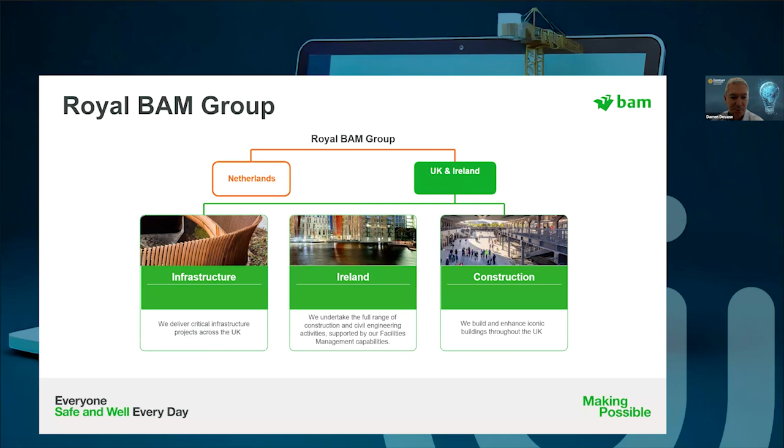So what do we do? In terms of infrastructure, we cover the entire range of infrastructure sectors in Ireland, with transportation, including light and heavy rail and roads, bridge construction, renewable energy infrastructure, and marine works. On the construction side, we work in the education, healthcare, commercial, high-tech and residential markets. And you probably see there in the middle, we're even delivering the new children's hospital that you might have heard about, as you'll see from the photo in the middle of the slide.

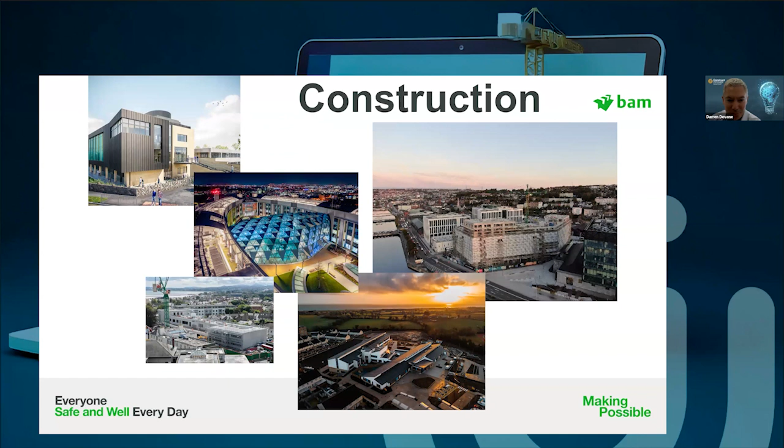We also have a property division, which delivers student accommodation, amenity centres, and both high-rise and housing developments across Ireland. Finally, we have a facilities management business, which maintains schools, court buildings, universities, shopping centres, and government agency buildings. So that gives us, I suppose, an edge from running through the entire life cycle of a building or a piece of infrastructure, from design right through to the end of life of an asset.

So what I'm going to talk to you about today is to give you my perspective about what's really the honest conversation around MMC. And I think it's important, first of all, to acknowledge the really successful implementation of modern methods of construction across all aspects of the construction industry in Ireland. In the last 20 years, we have shifted massively from an industry that, I suppose, stick-built every element on construction sites to one where off-site solutions are now the preferred solution for us.

The use of timber frame structures is well established in Ireland, and I'd estimate at this stage that approximately 70% of our housing delivery now uses timber frame solutions. When we get into the larger scale and more commercial buildings, precast concrete options are now our preferred solution, and they're used extensively in education, healthcare, industrial and residential apartment developments. And I have to say the precast companies really have adopted new technologies to push the boundaries of what is feasible to manufacture off-site.

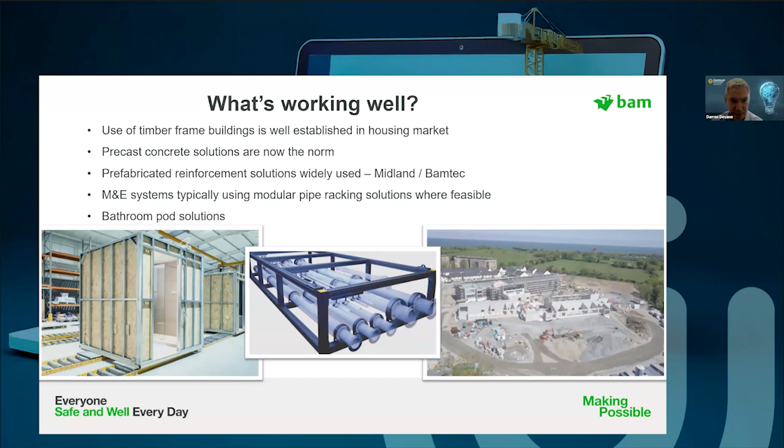You see there a clip of just some bathroom pods as well, which are a great example of modern methods of construction and offsite manufacturing done really well, done to a high quality and at scale and pace. So I think it was just important to point out it's not to throw the baby out with the bathwater, because there is an awful lot of really good work going on in the modern method of construction space. But that's not what we're here to talk about today. I suppose we're here to look at what's gone wrong.

We'll all have seen the headlines, particularly in the UK, around companies leaving the market, particularly the 3D volumetric market. In the UK, it even prompted the government to instigate an inquiry in the House of Lords, effectively asking this very question: what has gone wrong? And you can add us to the conversation as well in BAM, because while we are a main contractor, we also invested in a modular building company in 2019. We delivered approximately 1,000 homes, 1,500 bathroom pods, and a lot of construction site accommodation for our projects. But unfortunately, we took the difficult decision in late 2025 to cease operations at our factory in Cavan. So I think we have a close enough insight into what goes well and what doesn't go so well on the modular side.

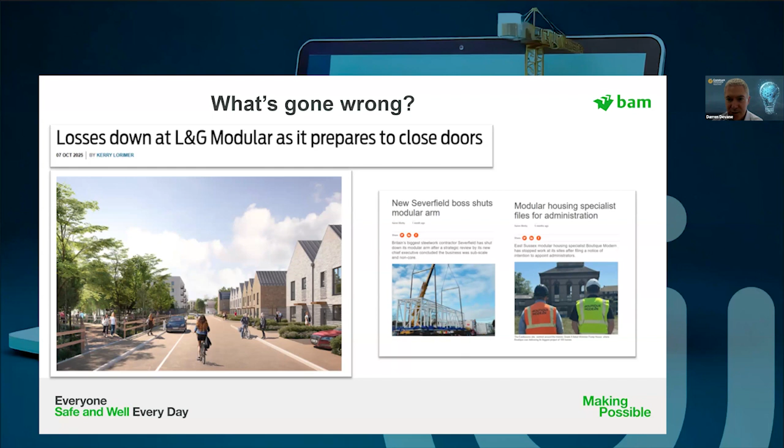So what led us to take that decision, and what are some of the challenges facing the sector from my perspective? A lot of what I will go through on this slide really relates to our experience of the 3D volumetric market. Really high upfront investment costs are certainly a significant factor. While BAM might be a large organization and able to finance that, for smaller organizations, trying to make that investment upfront is a significant outlay, when you don't tend to get your money back until the product is installed and certified on site, albeit there are vesting options that do come into play in certain instances.

The lack of standardisation is certainly a challenge facing the sector. The certification process, once you have it, is great, but securing the NSAI Agrément certification is an onerous task, certainly when compared to the 2D solution. But I would say the major challenge facing the sector is the inconsistent pipeline visibility, which is a challenge across all areas of the construction industry in Ireland, not just the modular space. I think we spend a lot more time than we would like crystal ball gazing when trying to plan our business growth. We've had the National Development Plan announcement in July of 2025 with significant commitments to infrastructure delivery for Ireland, but with little granularity to allow us to plan for that investment.

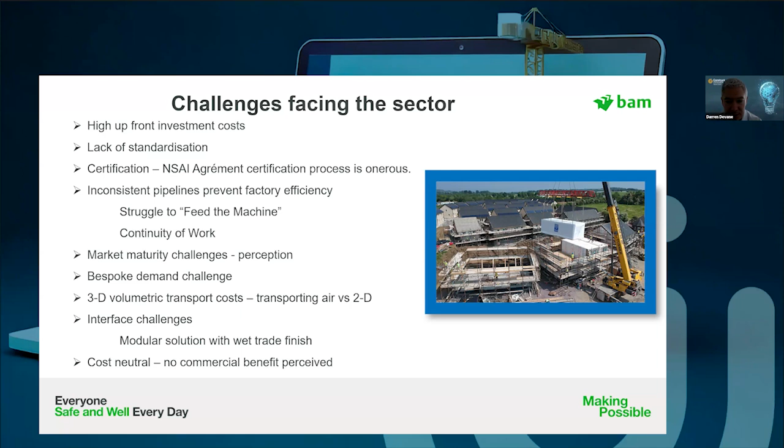Transport costs are certainly an issue when we look back and we count the numbers, particularly for 3D volumetric, where a lot of what we are transporting is air compared to our timber frame solutions. And then the framing around cost is, to my mind, somewhat narrow-minded. When we compare the direct cost of a modular solution versus an in-situ solution, it may be slightly more expensive. However, we really have neglected to take into account the savings in preliminaries, the savings in defect rectification from site-installed processes, and the superior quality of a product manufactured in a controlled environment.

So again, some of the key challenges that we have found: it does require early design freeze. When you're setting up a factory and you're setting up your equipment, this needs to be done at the early stages of the project. It does force the design teams to freeze the design early, and sometimes that can be a challenge because, I suppose, we're not making Swiss watches here. It's construction and things do change as projects evolve.

No question about it. The continuous pipeline I've spoken about is, to my mind, the single most important factor in trying to promote the use of modular solutions. Design restrictions certainly play into this. Precise planning is another issue we've found, where the integration between the elements that are constructed in situ versus the precise product that comes from a factory environment sometimes can pose a problem. The financial model I spoke about earlier, companies trying to secure funding and the upfront costs involved in providing a modular solution can be a strain for a lot of organizations.

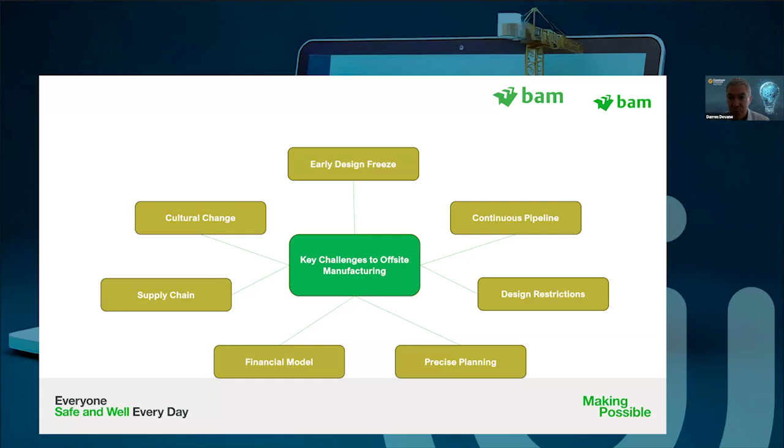Supply chain challenges are, I guess, no different to the rest of the construction industry. There is a demand now for construction and skilled operatives in our industry, and that is only going to become more significant as the National Development Plan starts to come to fruition with major infrastructural projects really starting to come to sight. And then the cultural change, which again is the perception in the market around what modular construction is, what are the perceived benefits and what are the perceived weaknesses of a modular solution.

So in terms of some potential solutions, government supports are certainly required to incentivize the 3D volumetric market. There are major opportunities in healthcare, education and housing, and the government needs to provide visibility of a pipeline to encourage investment. The obsession with steel and concrete, as I said, needs to be challenged. The requirement for embodied carbon assessments in public tendering will certainly focus the market to look at alternatives, and that can only be a good thing.

Procurement strategies for public tendering. I spoke about the Department of Education and Youth, and they have an impressive framework of modular school building solutions in the market at the moment, and that is really positive to see. They may need to look at their award criteria for other public tenders to reward the use of modular solutions in the bid process. How we market modular solutions: as an industry, we need to dispel the myths surrounding it. We need to extol the positives and work to address the challenges that prevent it from being a successful solution for a sustainable industry.

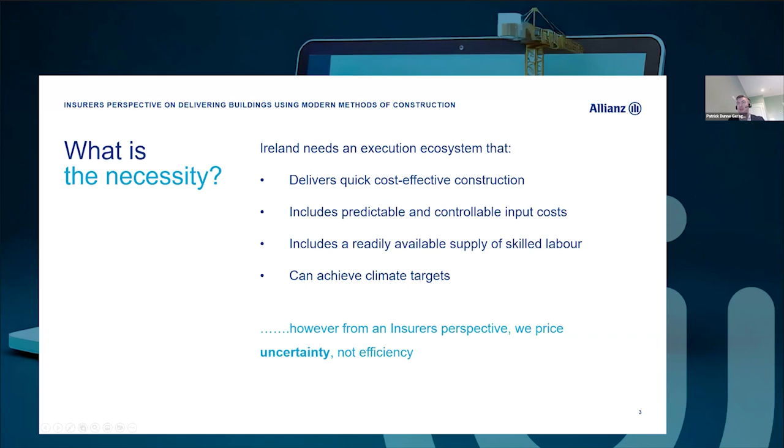So what's the result? So when you've got uncertainty in risk, it leads to higher premiums. It leads to capacity hesitation or appetite restriction from insurers. It can lead to exclusions and limitations. So what we mean by exclusions or limitations is if there's uncertainty around a particular type of construction or a methodology or a contractor's experience in delivering that construction, it might push it outside of appetite.

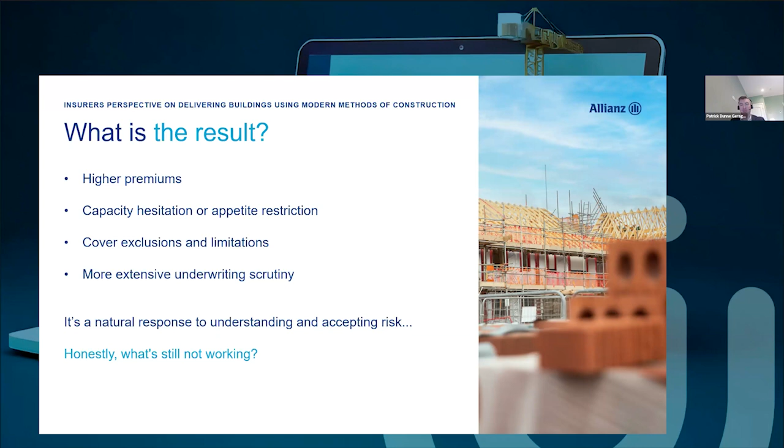We might restrict what we do, or it might be a case that we need to understand it a bit better. So what we might do in that instance is we might do pre-quote surveys to try and understand it a bit better. We might have a look at specifications, and we look at where we have interacted with that contractor, not necessarily just in Ireland, but perhaps in the UK or further afield as well. It also leads to more extensive underwriting scrutiny as well. So it's a natural response to understanding and accepting risk. But what we'd like to discuss then is honestly what's still not working.

So what do insurers want to see? So we as insurers, when we're looking at a risk, irrespective of what it is, we're looking for predictability. We're looking for repeatability, traceability, and accountability. So traditional construction gives us decades of claims data, and modern methods of construction don't necessarily do that. Now, that's not necessarily a negative thing as such. Just because we don't have the data today doesn't mean that we can't understand it and can't form a view on a particular type of construction.

One thing that Darren mentioned in his presentation was in relation to the modular housing. So we would insure a significant amount of modular housing. Initially, there would have been a bit of hesitation around that, not only Allianz in Ireland, but other insurers in the local market too. That hesitation comes from years of being used to insuring brick and block, stone and concrete properties. That move into timber frame took us a while to get used to as well, in terms of understanding what the potential was for loss. And then further, the likes of MHI, which was the company owned by BAM, which was an absolutely fantastic modular steel frame construction company.

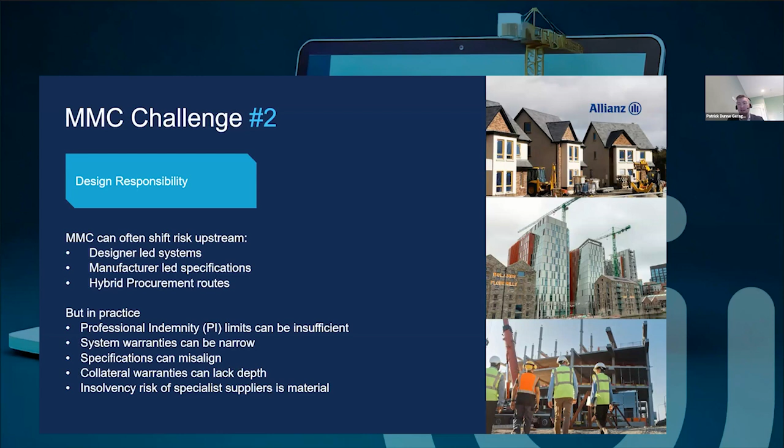The second challenge in relation to modern methods of construction is design responsibility. So MMC can often shift risk upstream for designer-led systems, manufacturer-led specifications, and hybrid procurement routes. But in practice, PI limits can be insufficient, system warranties can be quite narrow, specifications can misalign, as I mentioned earlier, one proclamation of a material being non-combustible, and then a certification stating that it's highly combustible. Things like collateral warranties can lack depth, and insolvency risk of specialist suppliers is a material risk as well.

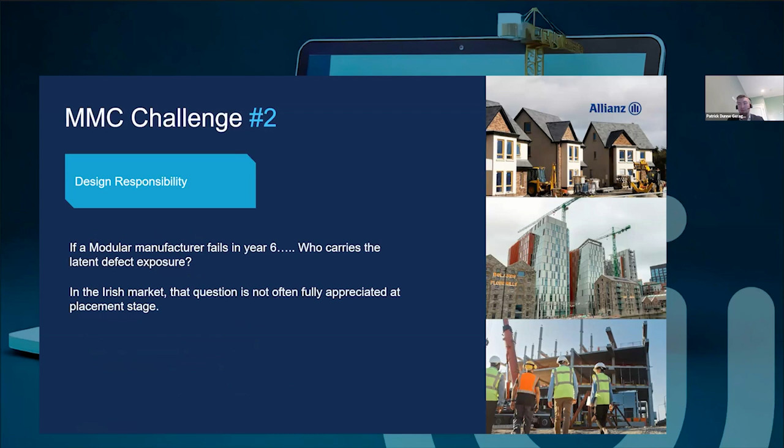Additionally, if a modular manufacturer fails in year 6, one of the questions that we ask is who carries the latent defect exposure? In the Irish market, that question isn't always fully appreciated at the placement stage.

The third challenge we have is reactivity to fire and water. Two of the most dominant claims types in modern methods of construction are fire and water ingress. From a fire perspective, we see cavity barrier variability, on-site modifications, and inconsistent supervision at junctions. From a water perspective, off-site precision doesn't always eliminate the likes of transportation damage, sequencing issues, interface failures, and weatherproofing issues. So MMC has not yet demonstrated a reduction in this loss class, and that's where insurers are quite hesitant in accepting modern methods.

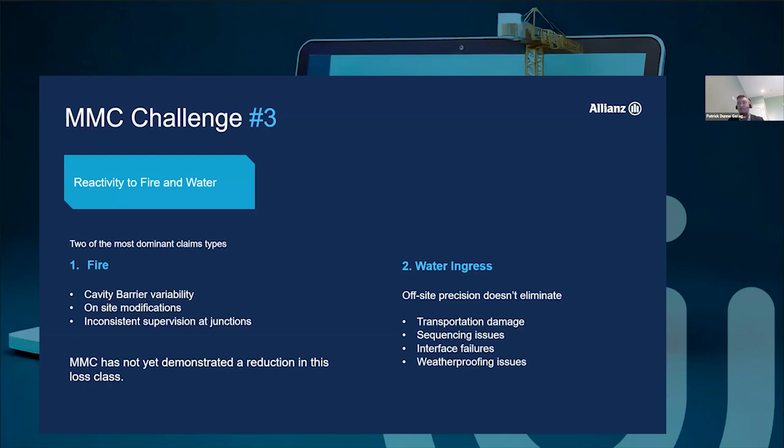Challenge number 4 is underestimation of factory risk. Modern methods of construction can centralize risk. When we're looking at a traditional construction site, you might have 100 contractors across 100 different sites. That risk is very, very well spread. Whereas if there's a failure in one factory supplying 1,000 modules, that failure is very centralized. So it's a single point of failure. There's business interruption exposure and accumulation risk across multiple developments.

If there's an error with one subcontractor, the issue is likely localized. If there's one supplier that has an issue, the issue is likely systemic. So traditional construction spreads the risk while modern methods of construction can concentrate it.

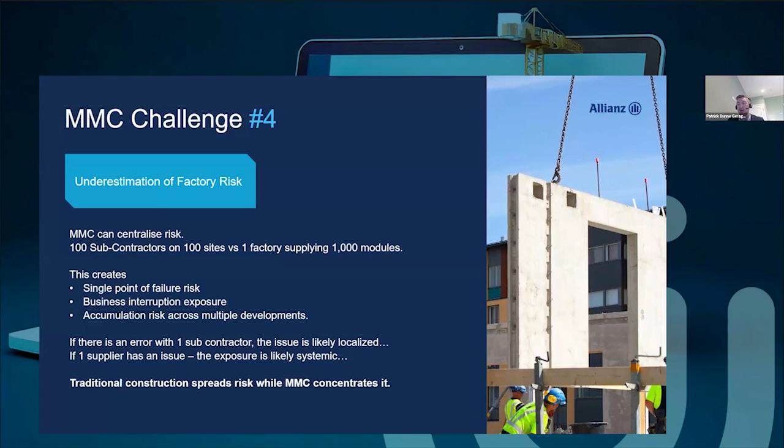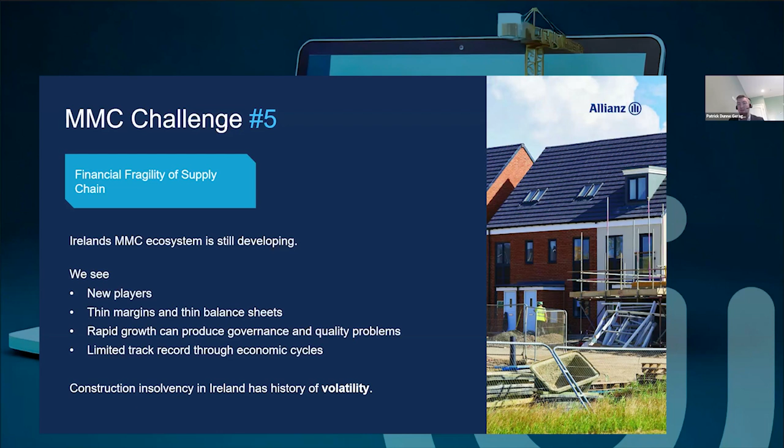Another thing that Darren touched on in his presentation previously was financial fragility of supply chains. Ireland's modern method of construction ecosystem is still developing. We see new players, thin margins and thin balance sheets, rapid growth, which can produce governance and quality problems, limited track record through economic cycles, and construction insolvency in Ireland has a history of volatility.

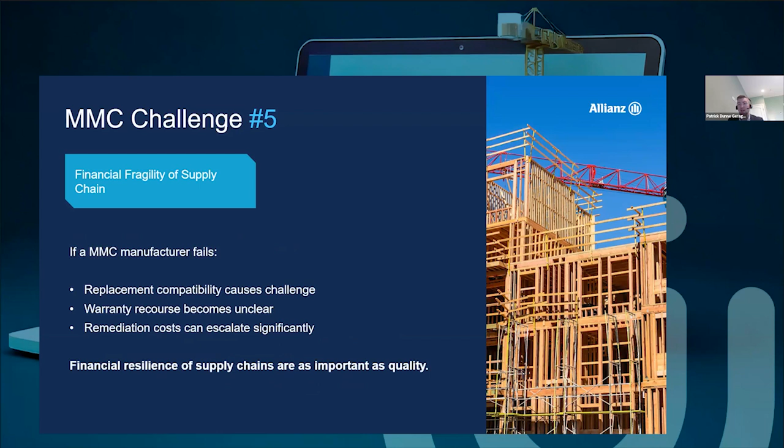If a modern method of construction manufacturer fails, replacement compatibility causes a challenge, warranty recourse becomes unclear, remediation costs can escalate quite significantly, and financial resilience of supply chains is as important as the quality.

Challenge number 6 is overstated standardisation. So modern methods of construction are sold as straightforward and repeatable, whereas in reality, sites vary, foundations and conditions vary. Same sounding methods can vary considerably. Reinstatement creates hybridization and oftentimes at a higher cost. We often see part traditional and part bespoke.

I just want to touch very quickly on the reinstatement creates hybridization and oftentimes at a higher cost. So you might have a bathroom pod solution and there might be a leak in that bathroom pod. Oftentimes the trace and access is quite expensive to find where that leak is, and oftentimes the bathroom pod is taken apart and replaced with a traditional system, which leads to a higher cost than originally envisaged.

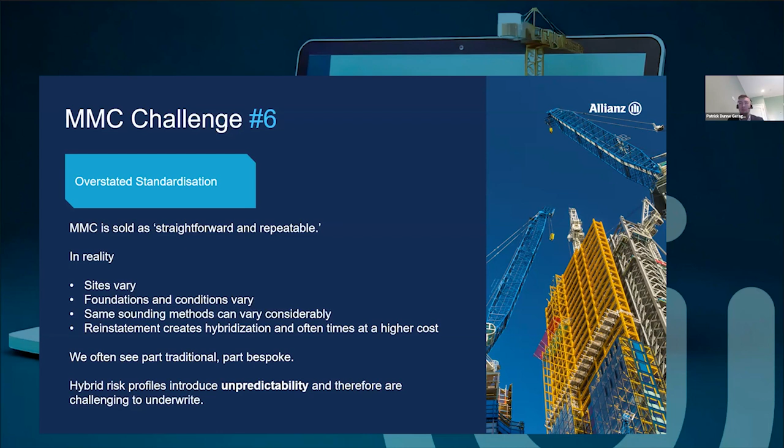Hybrid risk profiles introduce unpredictability and therefore are challenging to underwrite. When we say they're challenging to underwrite, it doesn't mean that we can't do it. It's just that we need to understand it a little bit better.

Challenge number 7 then is late insurance engagement. So insurers are most frequently consulted at inception or near practical completion. Often at both of those times, the decisions are locked in, which is a missed opportunity. So we as insurers are rarely involved in the original design phase. We're often brought into the fold very shortly before the project goes live.

And it's a missed opportunity for us to provide contractors and developers feedback in relation to what works in insurance and what doesn't. And keeping in mind, we have loss experience not only in Ireland, but across the globe that we can feed back into that process and help you. So if insurers are engaged at concept stage and during the system selection, many coverage issues can be avoided. When your insurer is a design stakeholder, it limits issues later on.

So we see the same challenges repeated over and over. And I suppose with being such a large construction insurer, we're able to share those challenges as they arise and allow you to make informed decisions. So what requires consideration? Industry-wide anonymized defect and performance data support certainty. Performance bonds aligned with latent risks. Financial stress testing of manufacturers. Robust insolvency contingency planning, and consistency of statements and certification.

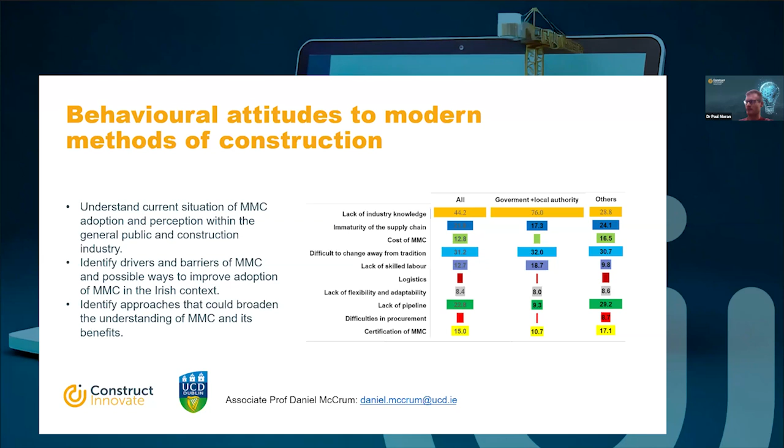So some of those issues are obviously still ongoing, but through the projects that have been funded by Construct Innovate and through all the various different working groups that have been set up across the different government initiatives, some of these challenges are trying to be addressed through various different projects. So one of the projects that we've funded here through Construct Innovate is a project involving the University of Galway and DRES, and the focus of that was the development and building of a community centre and a creche using mass timber and offsite design for manufacturing and assembly.

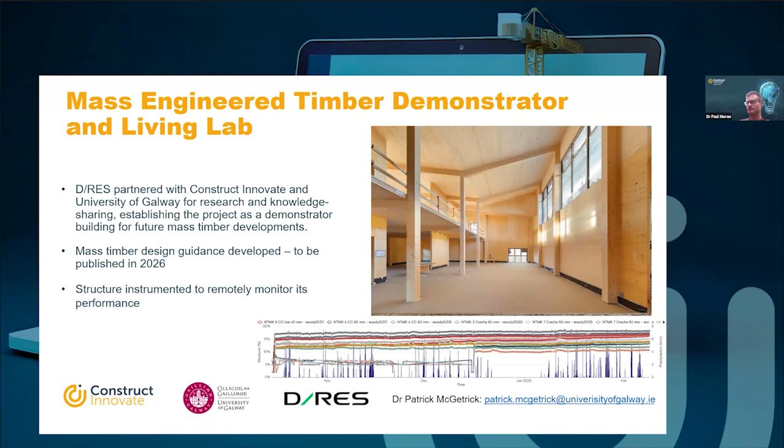So using these demonstrator buildings, the idea was to build up guidance that would help to inform the industry on how to deliver these projects, training the industry on how to deliver these projects, and then exemplar projects, demonstrating to the different stakeholders within the sector that these types of projects can be delivered successfully. So as part of that, there was ongoing monitoring to validate the performance of the buildings. And then on top of that, there was embodied carbon analysis carried out to show that this timber-based solution could be delivered in a sustainable manner and that it was meeting the Royal Institute of the Architects of Ireland embodied carbon targets.

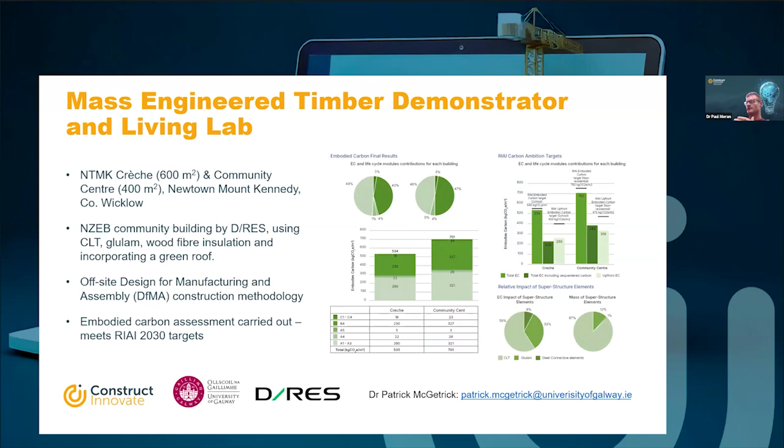So those projects are being built in Wicklow, and they're adopting the use of CLT, glulam, wood fibre insulation, and incorporation of green roof as part of their solution. And in the delivery of the project, I believe they're going to be delivered this year. All this design guidance has been developed and will be published by Construct Innovate, again, to help inform the industry on how these projects can be delivered in a successful manner.

Another project going on is focused on light gauge steel solutions. So one of the incoming building regulations for the industry is that we need to start assessing the embodied carbon of the projects that we are delivering in Ireland. And as part of this, University of Galway teamed up with Frame Space Solutions in County Longford to investigate what was the embodied carbon associated with their systems, and then identify potential solutions that they could incorporate to help decarbonize their current system offering to the marketplace.

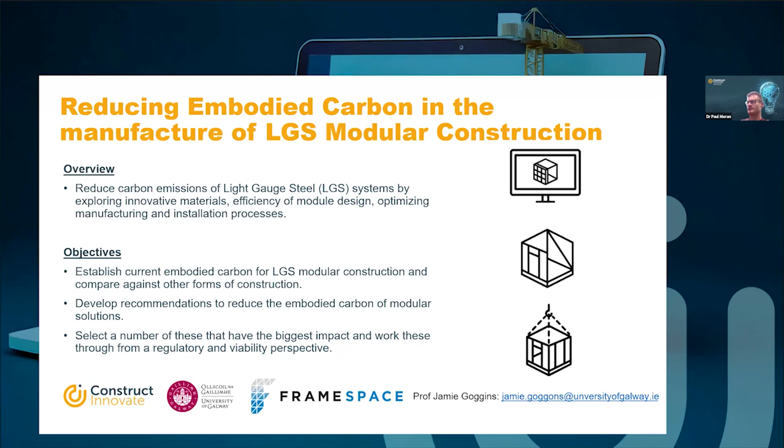Another project focuses on 3D concrete printing. So this project focused in on assessing whether recycled materials could be incorporated to help replace steel, all with the overarching aim to reduce the amount of steel in the way that we deliver projects, because steel is a high embodied carbon material. So all with the overall goal of reducing the embodied carbon and making the solutions for the marketplace more sustainable. So as part of that, the project, which involved Dr. Alireza Rahimi and Dr. Pouyan Ghabezi, I apologize if I mispronounced them, they identified different mixtures of polypropylene and high-density polyethylene, and how much of an impact it had on the properties of the system itself to improve the delivery of this 3D concrete printed solution.

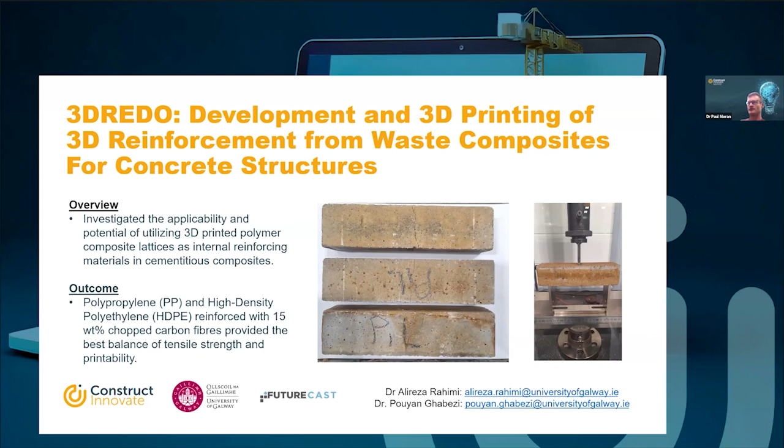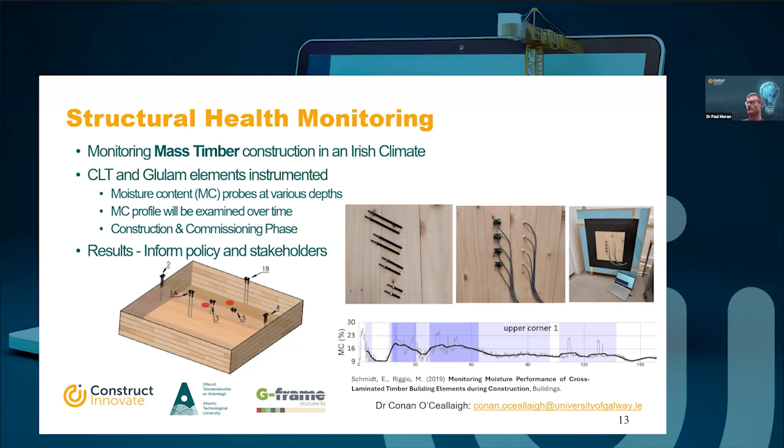One of the issues that was flagged on one of the previous calls was actually validating that these systems are going to produce long-term performance, and how do we go about de-risking that? So there's a project including Atlantic Technological University and G-Frame Structures. This involves actually monitoring the long-term performance of a CLT and glulam solution. So as part of that, they embed moisture content probes within the timber frame elements themselves and monitor the performance of the building over the long term to show how much the moisture travels throughout the building elements throughout the lifetime of the project. So Dr. Conan O'Ceallaigh is delivering that project, and if anybody has any further questions about that, they can get in contact with Conan.

Another project we have going on involves frame-space solutions in the University of Galway as well. As part of that, they are considering the way that they actually connect their MMC solution elements together. One of the issues with the delivery of MMC systems is actually connecting your modularized system together and the speed at which that happens.

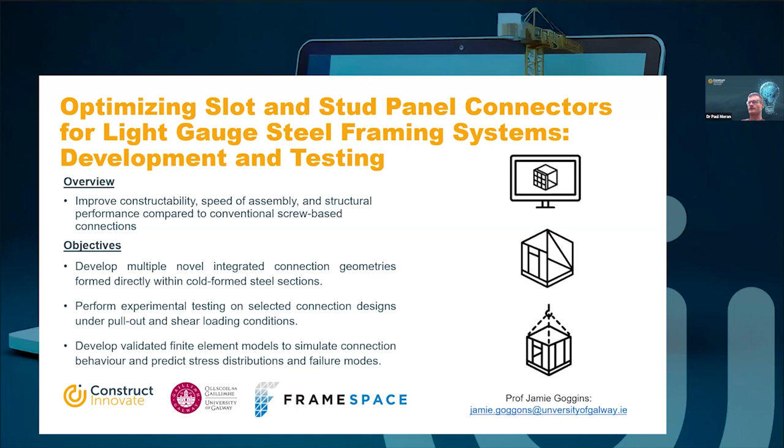Obviously, if you can improve the constructability and the speed of actually assembling your systems, that leads to a lot of benefits and helps to make the delivery of this solution more sustainable for the sector, reducing the cost of the overall system in terms of the time it takes to deliver the project. As part of this project, they are developing a series of different solutions, testing those solutions here in the University of Galway to validate performance, and then showcasing that this new type of connection system can be used for the delivery of the FrameSpace solution to the marketplace.

Then another ongoing project involving a series of different stakeholders, including University of Galway, Sisk, Coillte, Glenfort, with the main contact point from the University of Galway being Dr. Patrick McGetrick. This is focusing on manufacturing a project using cross-laminated timber, all sourced within Ireland. The focus of the project is showcasing that a project can be fully sourced, fully manufactured and fully delivered using resources obtained here in Ireland.

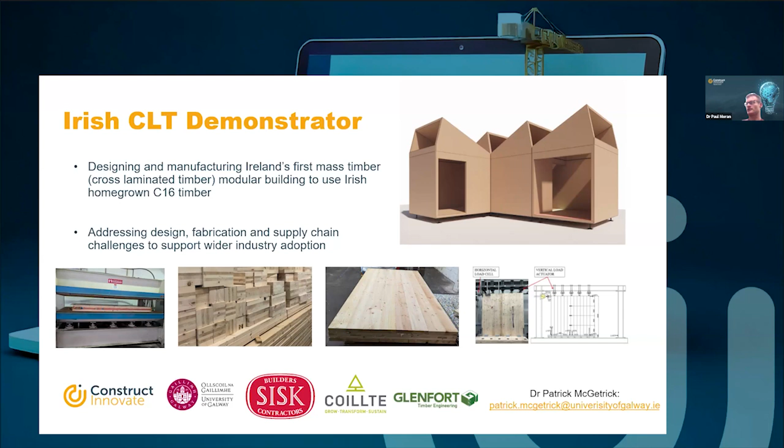That's using Irish grown C16 Sitka spruce. This is to showcase to the industry that this solution can actually be delivered, as well as tracking how efficiently it can be delivered to the marketplace on top of that.

Then this project called Standardize involves Dr. Daniel McCrum, Dr. Magdalena Hajdukiewicz, and Dr. Eoin King. It is a cross-collaboration between University College Dublin, University of Galway, and the departments of housing, of enterprise, trade and employment, and Enterprise Ireland. It focuses on developing standardized details for the way MMC systems are delivered to the marketplace, because there is such a high investment cost in getting Agrément certification for systems.

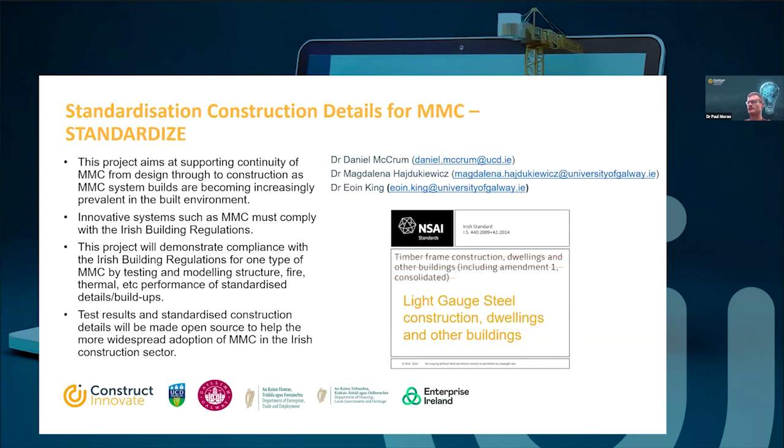If we can standardize these details, whereby Agrément certification would not be needed, that would make the delivery of MMC solutions to the marketplace a lot easier for suppliers and remove that initial burden of high investment cost in the certification process. So they're developing standard details, and then testing and modeling those details for structural performance, fire resistance, thermal performance, and moisture performance to validate that these standardized details can be delivered, and then creating these standards on top of that.

Then another project involving 3D concrete printing. In this project, HTL are working with UCD, with main contact points Professor Kieran McNally and Dr. Moran. Currently, when HTL deliver their 3D concrete printed solution to the market, they print the concrete layers at 50 millimeter thickness. The purpose of this project is to trial and assess whether that 50 millimeters can be increased to 75 millimeters, because the thicker the layer they can print on site, the less time is required to deliver these projects on site.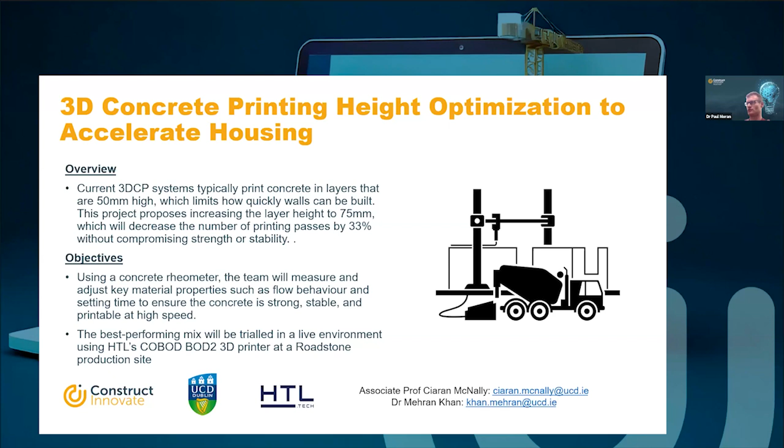And if they can reduce those times, that obviously leads to other benefits in terms of cost, etc. So again, it's companies coming with their challenges to academia, and academia investigating, improving a solution to help deliver a project in a more sustainable manner.

And then one of the recent projects that was funded involves UCD Dublin and Evolution Innovation and eTechs. So as part of that, they are developing a tool for helping to predict the cost of actually delivering MMC projects using light gauge steel. So taking the database of projects that have been delivered by Evolution Innovation, they are then developing a tool or an automated system that helps them to then price up the delivery of these projects,

because currently one of the barriers for actually delivering these projects is the conversion rate from actually tendering a project to winning it is less than 5%. So all with the focus of improving the efficiency with which they're delivering or pricing up these projects. And again, improving that efficiency just leads to other benefits as part of that.

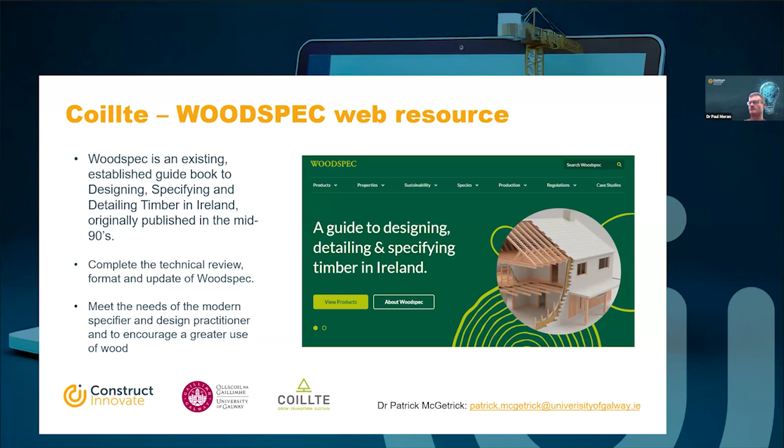Then a timber-focused project involves WoodSpec. So this is an established guidebook for designing, specifying, and detailing timber in Ireland. So the focus of this project is to complete a technical review of the current guidance and then update that to represent current practice within the marketplace. So that's involving University of Galway and Coillte, and Dr. Patrick McGetrick is the lead PI here in the University of Galway.

And then another project which is focusing in on procurement, which has been flagged in some of the other presentations, not just today but throughout the webinar series, is the importance of the pipeline of projects needed for MMC to be successful. And the government need to improve the way that they tender or advertise their projects, helping to promote the use of MMC as part of those projects.

So this project is focusing in on how to develop some metric that can be embedded in the way that projects are advertised, so that it helps MMC manufacturers to then meet those targets and help them to then win the tenders on those bids as well.

And the purpose of Construct Innovate is to help matchmake industry personnel or industry companies get in contact with experts within academia, and help come up with approaches or solutions to help address their ongoing challenges. So maybe people on the call today are from companies that are aware of this already. Maybe there are companies that are not aware of this, but if any companies have any ongoing challenges, and I know there's a series of challenges highlighted in the last 2 presentations, companies can contact Construct Innovate.